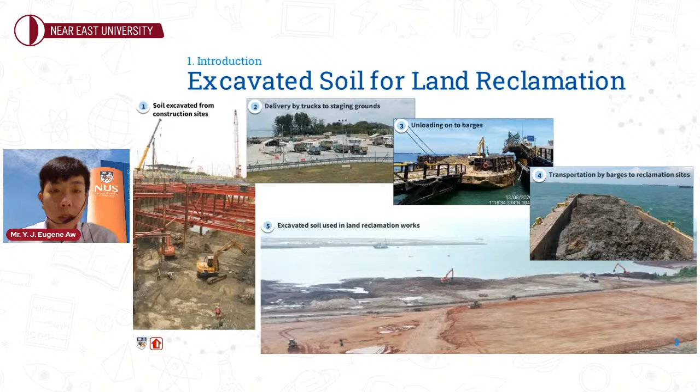After the soil is excavated, we transport them using trucks to facilities we call staging grounds. Over here, the soils will be loaded onto barges where they will be transported to the reclamation sites, and they are used for various reclamation works that depend on the soil property and quality.

There are two main uses for the excavated soils at our reclamation sites. The first one is soft clay, which is the clay soils that are very soft and also wetter, mainly used as infill material from the seabed to above seabed level. This soft clay has to be treated in order to accelerate consolidation and strength gain. The second type is good earth soil, mostly used for internal containment bunds and also the topmost layer of soil for compaction.

So misclassification of these soils may result in suboptimal use of the material and may pose challenges downstream. So there is a need for accurate classification of these excavated soils.

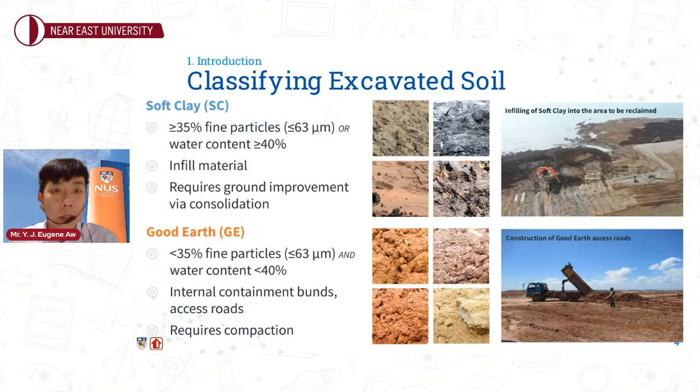The current classification process starts off with limited borehole data and soil sampling of the site. Then we move on to the excavation activities itself, and next is to transport these excavated soils. Finally, we conduct visual inspection and classify them into either good earth or soft clay.

The issue with this is that we receive thousands of truckloads a day, and lab testing of each truck is not practical and also labor intensive. Hence, we want to explore new technologies to improve this classification process, and develop a rapid soil classification method that is accurate, non-destructive, and also automatable.

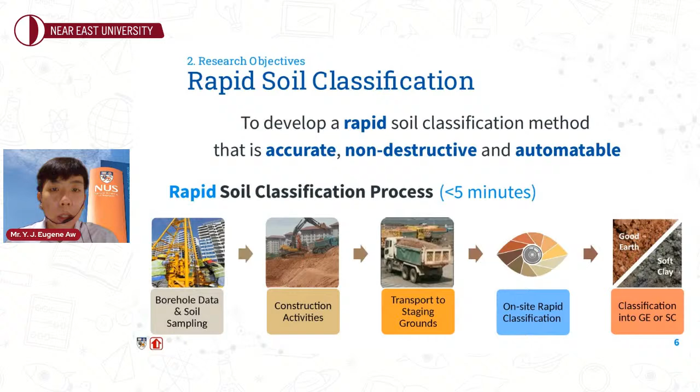So instead of the usual current process, we shorten it over here. Okay, the animation doesn't play right. Anyway, we will substitute it with on-site rapid classification, and this will replace the visual inspection and bring about objectivity and also more accurate and fast results.

So how do we do this? We explored the use of AI and computer vision to replace the visual checks at the staging grounds.

This computer vision process can be simplified into a four-step process. First, we obtain the image, the image acquisition. Next, we process it, segmenting the image and converting it to grayscale. Third is the image analysis, where we quantify the texture of the image using a gray-level co-occurrence matrix. Finally, the last step is to decide whether it is good earth or soft clay.

The hypothesis is that it is possible to use artificial neural networks to classify these excavated soils into two categories with more than 80% accuracy and in less than 5 minutes.

From previous research, we concluded that it is possible to use ANN, and we calibrated it using image texture feature data obtained from representative soil images. We successfully used them to classify into good earth or soft clay with decent accuracy.

However, the current system only captures data on the surface and does not account for possible soil layers that may be present underneath. Hence, this presents an opportunity for us to evaluate other methods and seek the feasibility of classifying soil with depth using complementary soil parameter measurements such as resistivity and soil strength, which I'll go through later.

The brief overview of the steps: firstly, we prepare the soil samples. We have 4 main tests. The first 2 tests are homogeneous soil mass, either good earth or soft clay. For tests 3 and 4, it's layered soil, meaning there's one soil type on top and another below. We perform 3 main tests: apparent resistivity, CPT, and moisture content. Finally, we evaluate the results.

In the first step, we prepare the soil samples in this huge soil box, about 1.8 times 1.2 times 1.2 meters, and we fill it up to about 1,000 to 1,200 mm of soil.

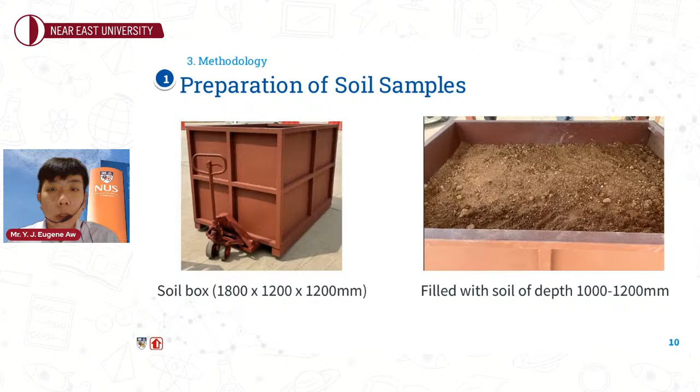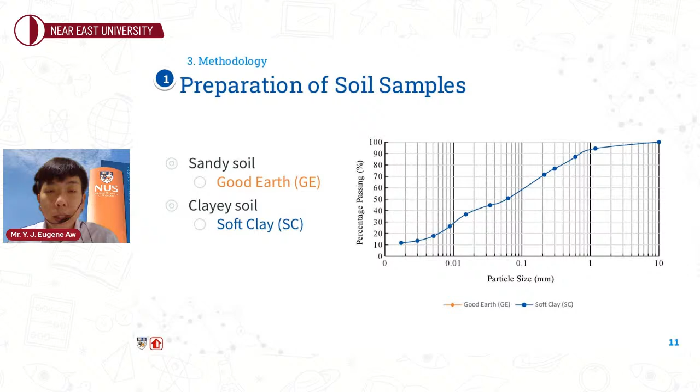For the test setup, we have the soil box, and secondly, the sensors installed on this huge frame. We have actuators installed above these sensors to push them down into the soil box.

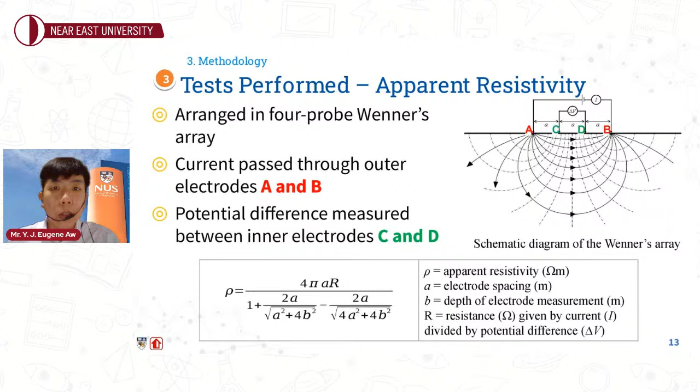The first test we perform is the apparent resistivity test, where we arrange 4 conductive probes in the Wenner array. We pass current over the outer 2 electrodes A and B, then measure the potential difference between the inner 2 electrodes C and D. From that, we can measure the apparent resistivity of the soil bulk under these 4 electrodes.

The second test we perform is the CPT test, where we developed a CPT cone in-house, and data is captured every second. The penetration rate is 8 mm per second, which is less than the standard 20 mm per second, because we want to ensure better sensitivity in the shallow thickness soil mass, since we only have about a meter of soil.

The final test we perform is the TDR, a time domain reflectometer, an instrument that sends a planar EM wave along the waveguides. The velocity of this propagation is used to derive what we call an apparent dielectric constant, a type of soil property, which is used to estimate the in situ volumetric moisture content. This is the instrument we use to measure moisture content without doing the standard oven dry method.

So over here at the results and discussion, firstly I'll go through the homogeneous soil, where test 1 is the homogeneous good earth, and test 2 is the homogeneous soft clay.

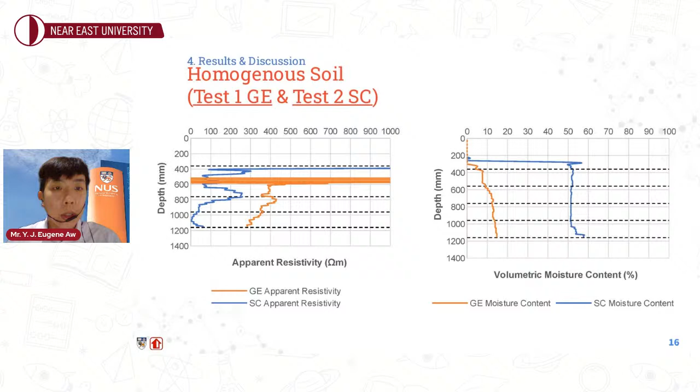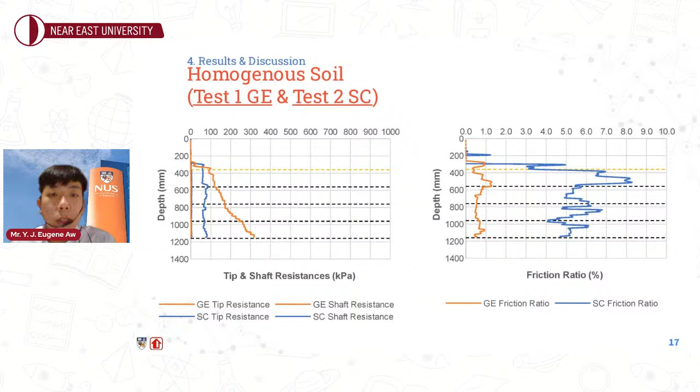On the right, the friction ratio also shows that the one in blue is definitely clay, hovering between 4 to 7%. On the left, the orange one, the sandier soil, is between 0 to 1%. So it's very clear and distinguishable between the two soil types.

Moving on to the layered soil, for test 3, it's the good earth soil on the top half and soft clay on the bottom half. Test 4 is the opposite.

To give a short summary of results: first, for homogeneous soils, these complementary soil parameter measurements were consistent throughout the soil depth. Second, for layered soils, these measurements are able to show significant differences between the top and bottom layers because they are different types of soils.

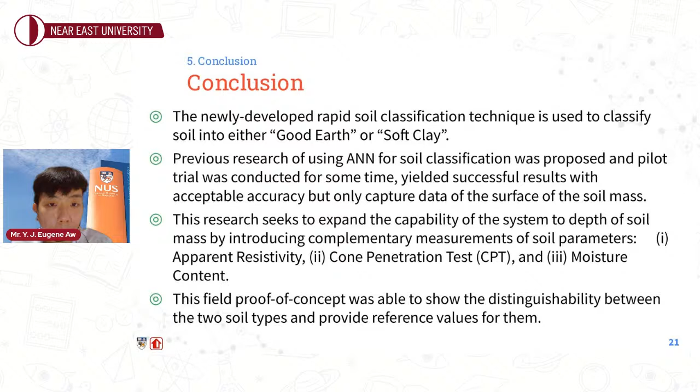This field proof of concept has shown that there is distinguishability between the two soil types. So that concludes my presentation. Thank you.

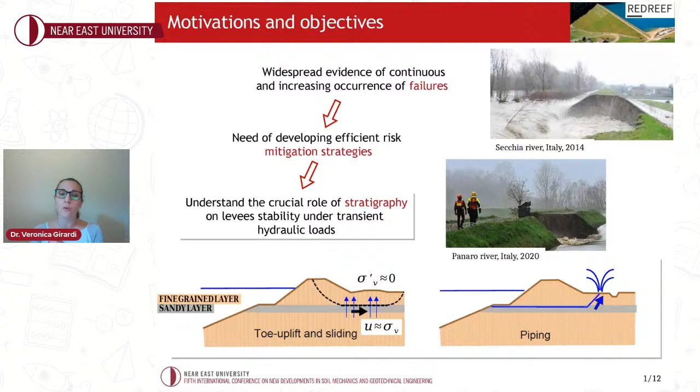Near the toe area, these two mechanisms have been investigated before, but they are still partially unknown and very hard to reproduce, especially numerically. They are also complicated in terms of prediction because we don't really know their spatial extension—whether they are just localized near the toe or may end up involving an entire collapse of the levee section.

For this reason, we decided to investigate these two potential phenomena using, in a combined manner, physical modeling by employing geotechnical centrifuge tests, and numerical modeling.

The first approach helps us investigate favorable conditions for instability in our structures and analyze the entire failure event, which is not always possible with available numerical codes, and also allows us to test monitoring instruments.

On the other side, numerical modeling helps us as a preliminary support to the physical test. It helps us carry out retrospective analysis and develop predictive models to be applied in other geotechnical engineering contexts. So my presentation today focuses on the numerical analysis that supports the physical test, in the sense that it supports the design.

In our team, we decided to test three well-known methodologies: the finite element method, the generalized limit equilibrium method, preceded by a seepage analysis, and the Van method, which is based on a force approach. It helps us define a factor of safety, like the other two methods.

The benefit of the Van method compared to the generalized limit equilibrium method is that it doesn't consider a purely circular slip surface. It can account for a straight part between two circular sides, forming a more complex triple sliding surface. These three methods help us try to reproduce the uplift and sliding phenomenon.

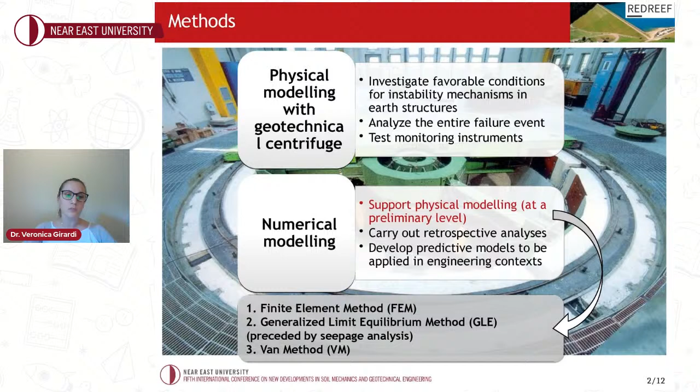On the other side, for piping, in a preliminary manner, we did an assessment based on some empirical relations.

We can start by going through the geometry we decided to test and the materials used. As you can see in this slide, I report the geometry at the prototype scale, which is also the scale we consider in all our numerical simulations, while the centrifuge is at the model scale. The relation between the lengths of the two models is controlled by the gravity scaling factor, which in our case is equal to 50.

We decided to work with a levee body composed of a mixture of two materials, TS and PON, standing for Ticino sand, a coarse to medium sand as visible in the granulometric curve at the bottom of the slide, and Pontida clay, actually a clay silt with low plasticity. Both materials are readily available in our areas and also used as construction materials.

Below the flood embankment, we can find a first layer of Pontida clay, and under it a layer of Ticino sand, which is shaped with a sort of chimney shape in a manner that we have direct interconnection of flow from the river side to the land side.

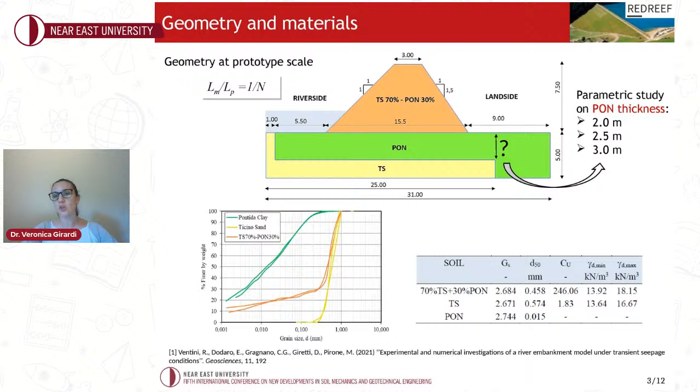We are particularly interested in understanding the impact of the thickness of the Pontida clay layer on overall stability, so we tested three different geometrical configurations with thickness 2, 2.5, and 3 meters.

During the centrifuge test, we have two principal phases. The first is the acceleration phase, where we go from zero gravity to the target gravity value. During this phase, we observe a consolidation process in our levee and in the foundation soils.

This phase is followed by a phase in which the river level is rising. We want it to rise to achieve a significant increase of pore pressure in the foundation soil. At the numerical model level, the first phase, acceleration and consolidation, can be reproduced very well with FEM, but not with the other two methods.

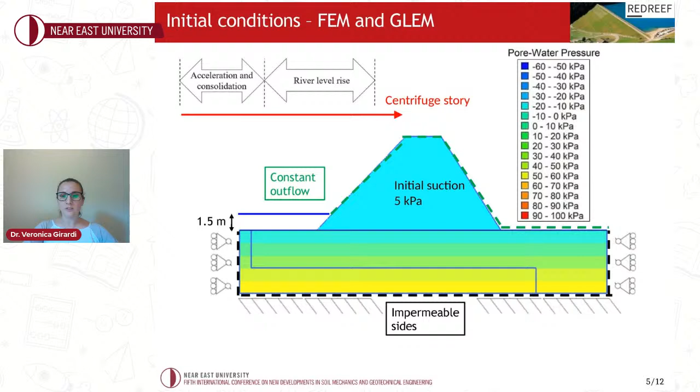The result of this boundary condition application is a distribution of pore pressure that you see in this slide. It's a little bit covered by the other graph because the animations are not really functioning well. I'm sorry for this, but the distribution of pore pressure you can see in the background is the one shown here.

After the initial part, acceleration and consolidation, we can move into the rising water table phase. In this part, we had to design a specific hydrograph that guarantees the increase of pore pressure and a certain control of the pore pressure distribution and of the failure mechanism.

Then the generalized limit equilibrium method, which comes after seepage, is performed at every instant of the seepage analysis during all the river level rise.

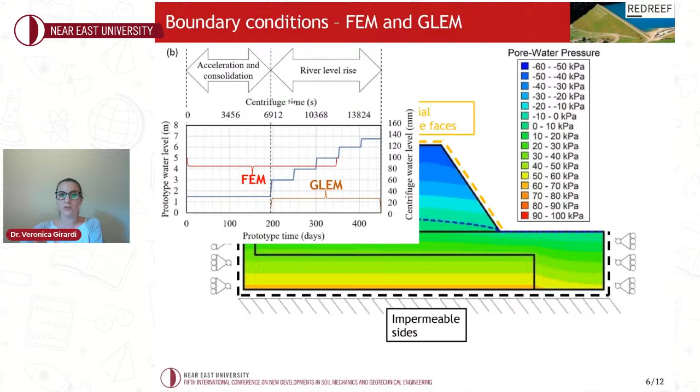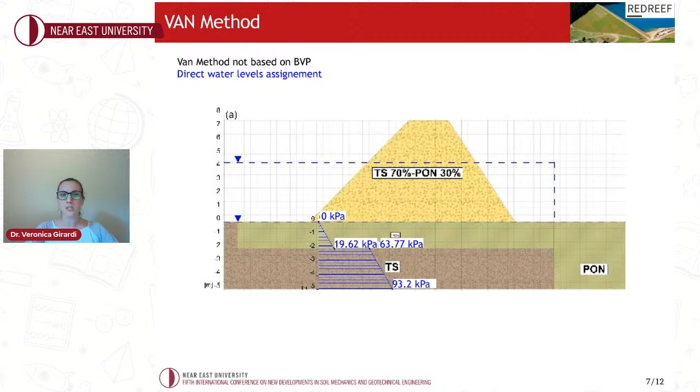Concerning the Van method, this is not based on a boundary value problem, so we don't have a seepage analysis. We can directly impose some water level, and we decided to work with two different water levels, one that imposed the distribution of pressure in Pontida clay, and one a little bit higher that imposed the water level in Ticino sand. This is based on an assumption of undrained behavior of Pontida clay with a concentration of high pressure only in Ticino sand, based on some previous experiences also in the literature.

Let's see now the results. First I want to present the results of the FEM simulation in terms of contour of pore water pressure, incremental deviatoric strain, and plastic failure points.

As you can see, we have a progressive increment of the distribution of pore pressure. In particular, when we pass from the river level of 3 meters to 4 meters, we notice that in terms of incremental deviatoric strain, we have a strong localization and concentration near the toe area, with an extension also on the land side and the river side. This has a correspondence in the sudden increment of plastic failure points near the toe, which somehow suggests the onset of an instability mechanism.

But we are interested not only in the FEM analysis, but in seeing the overall results, comparing them with the generalized limit equilibrium method and the Bishop method. If we consider the first two methodologies in the graph labeled A, we reported the evolution of the factor of safety with time and also the progressive increment of river level.

As you can see, in general, the generalized limit equilibrium method suggests the possibility of increasing the water level a little bit more before we reach a factor of safety less than 1, the condition of instability. In both methods, we can clearly see that the increase in thickness of the PON layer acts in a stabilizing manner, allowing higher water levels before instability occurs.

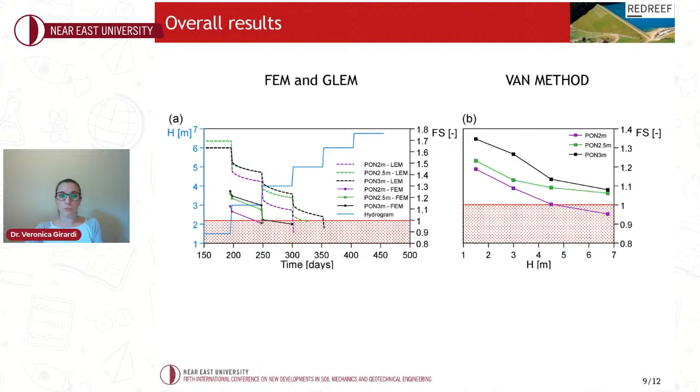On the other side, when we look at the Bishop method results, only the case with thinner PON thickness reaches a certain instability situation with factor of safety less than 1, while the other two geometrical configurations do not show potential instability, probably due also to the approximation we made in terms of pore pressure distribution. I will go briefly through the piping assessment, done with 3 different criteria.

These are the Bligh, Lane, and Sellmeijer criteria. In all of them, we had to compute the minimum seepage length and the creep coefficient based on the properties of the sand layer. Additionally, we assumed that the pressure head is different than 0 at the exit point, based on a recommendation popular in the Netherlands. And we calculate the critical head with these 3 criteria.

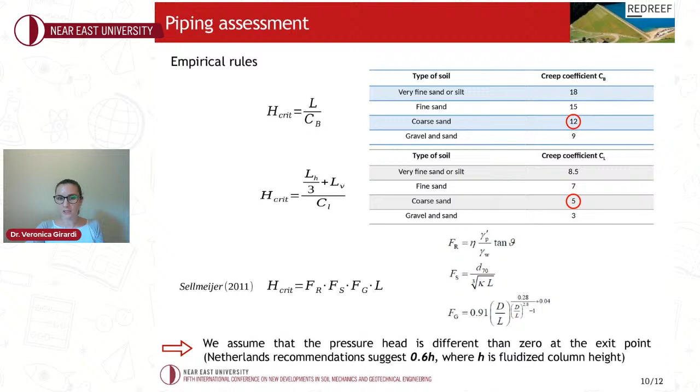I'm going to show you the results now, together with the previous results. What appears is that if we look at these criteria, the Sellmeijer method gives a lower critical head compared to the other two methodologies. Overall, they are a little bit lower compared to the results we obtained with the numerical simulations.

The 3-meter PON thickness, the bigger one, is actually guaranteeing higher water levels, which are still not as high as the levee crest, so we have a certain margin of potential additional rise. So we believe the potential optimum geometry that we are going to test is the one with PON thickness equal to 3 meters.

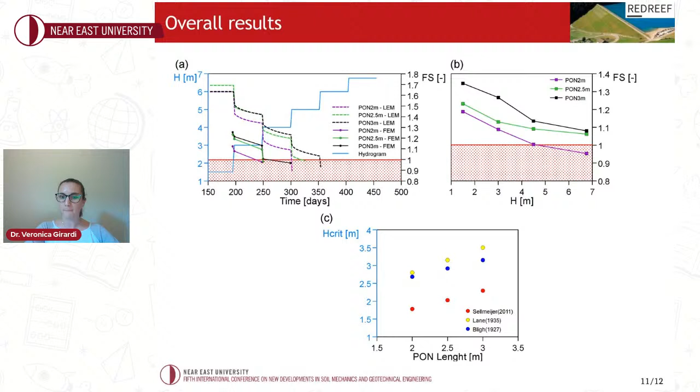To conclude with this study, I hope I was able to show you how we worked toward the design of a geotechnical centrifuge test by defining the geometry, the foundation layer thickness, and the selection of the hydrograph that highlights critical hydraulic heads which could potentially trigger failure.

To conclude, I want to show you the suggested location of the monitoring instruments during the centrifuge test. We believe it will be efficient to place a series of miniaturized tensiometers in the levee body and near the toe, a series of piezometers in the foundation soil to monitor the rising water pressure in the sand and also in the Pontida clay, and LVDTs and rototransducers near the toe area and the crest to monitor displacement and deformation during the test.

So thank you for your attention. If you're curious about the development of this project, here I've reported the link, which is an ongoing project, and we hope to show you further results soon.

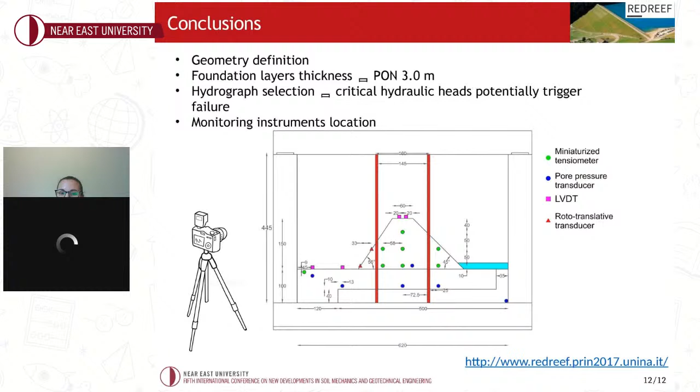Thank you, Veronica, for your nice presentation and your timely presentation. Thank you again, and now we are going to our next presentation.

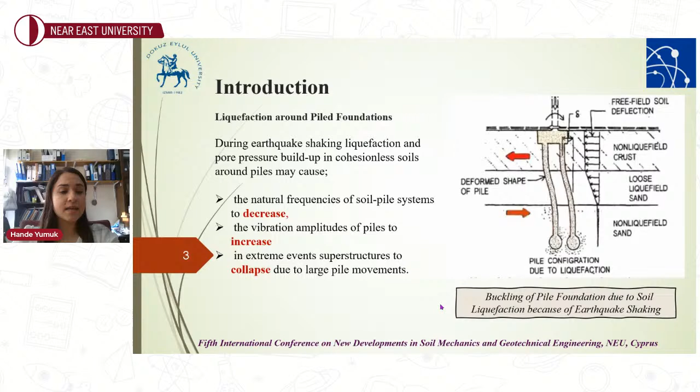As we talk about excess pore pressure's influence on inertial pile response in general, we talk about liquefiable soils surrounding pile foundations. During earthquake shaking, liquefaction and pore pressure buildup in cohesionless soils around piles may cause the natural frequency of soil-pile systems to decrease, and the vibration amplitudes of piles to increase. In extreme events, superstructures collapse due to large pile movements.

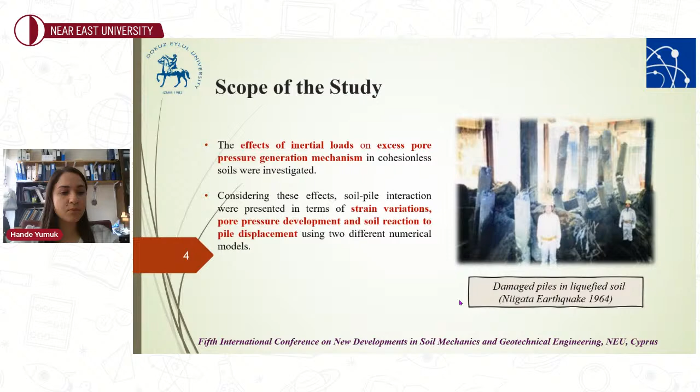The effects of inertial loads on excess pore pressure generation mechanism in cohesionless soils were investigated, as I said. Considering these effects in our study, we are going to see pore pressure development and soil reaction.

Let's show the influence of excess pore pressure development on pile response with the help of an analytical model. For instance, in this slide, we see the model by Kagawa and Kraft. In equation 1 here, the soil reaction is a function of soil stiffness and displacement rate.

However, it should be mentioned that in liquefiable soils, the influence of viscous damping is always negligible, and soil hysteretic damping as a result of nonlinear soil response is much more important.

We can see the backbone curve can be established step by step until we obtain the modified backbone curve, and excess pore pressure influence is incorporated into the backbone curve using excess pore pressure ratio.

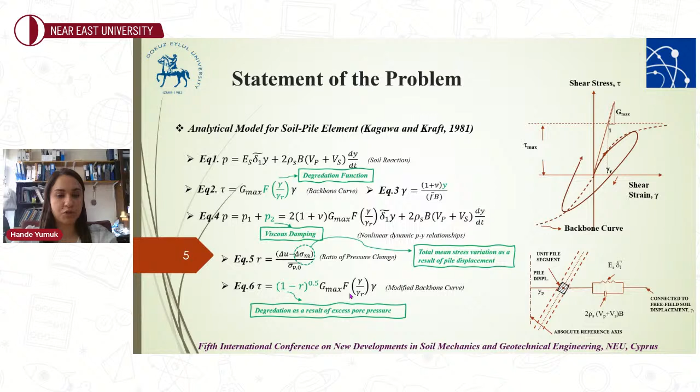Although analytical models such as the one given in this presentation may be utilized to incorporate the influence of both free field and near field excess pore pressure generation, the model may also be utilized to define excess pore pressure generation due to inertial interactions solely. Here we can see the final form of soil reaction as given in equation 4.

Now the question is to obtain excess pore pressure as a function of soil density, loading frequency, loading intensity, and the number of cycles. We try to obtain these within the scope of this study. However, I should mention that the results represent the preliminary results of my thesis.

As the study essentially targets pile response in saturated cohesionless soils, the Wildlife National Geotechnical Instrumentation Site was chosen. The University of British Columbia sand model was the material model used due to availability of calibrated UBC3D-PLM models in the literature. Soil parameters assigned to the finite element model are given in the table.

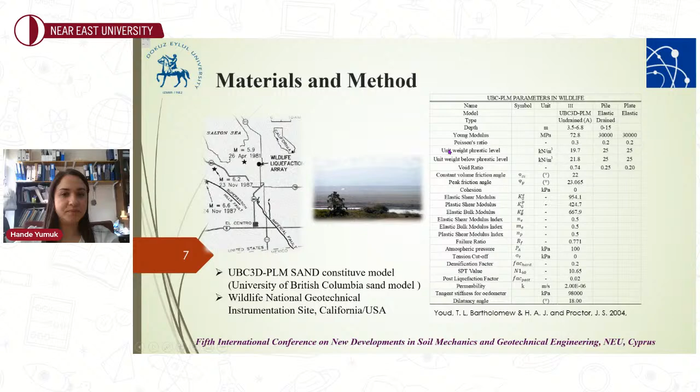The pile was modeled as an elastic volume element using a non-porous material model. There is a single pile that is fully embedded in loose liquefiable soil.

Two modeling approaches are considered in the study. Model A is a full pile-length model, and Model B is a slice model to represent a 1 meter thick cross-section of the full model. We run the slice model because it's useful to control boundary conditions.

We restricted the pile and let it displace only in the y direction, which is the loading direction. In these terms, we avoided rotation and just observed the changes in soil response as a result of lateral pile displacement. The mesh quality was reasonable in the finite element models.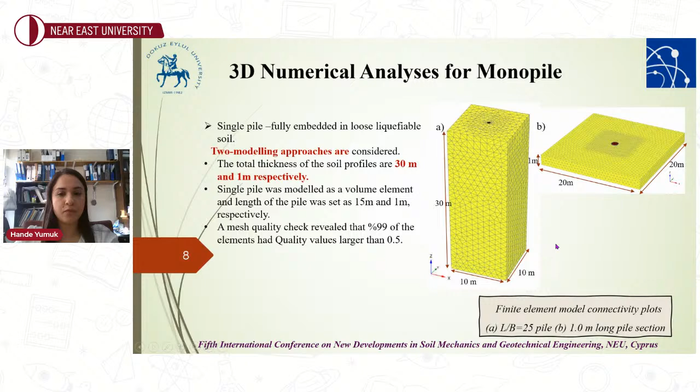The dimensions of the models can be seen in the figure. The slenderness ratio of the full-length pile is 25. In the analysis, we employed 10-noded wedge elements. The interface coefficient was 0.67.

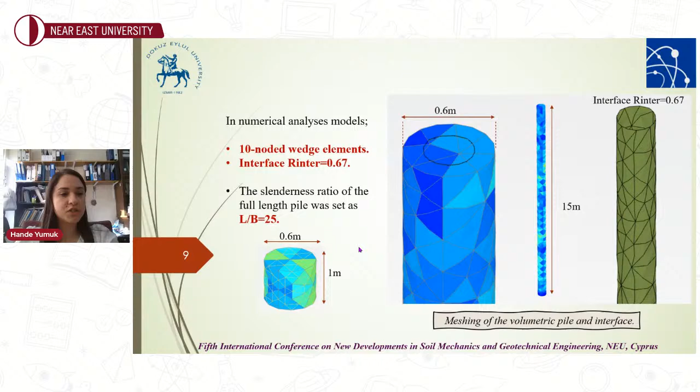We ran monotonic and cyclic analysis under drained and undrained conditions. The loading intensity varied between 25 and 300 kilopascals in the monotonic analysis, and 25 to 200 kilopascals amplitude with 1 and 2 hertz frequency in the cyclic analysis.

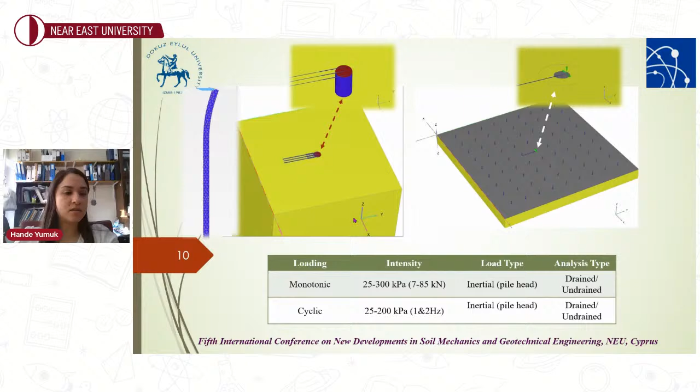We can see that especially at large loading intensities, the soil next to the laterally displacing pile liquefies for sure and gets into a probably viscous liquid state. As we go away from the pile, excess pore pressure development diminishes quickly. We can see that at smaller amplitudes, there's initially contractive behavior; however, after small strain amplitudes, dilative behavior governs, and the pore pressure development quickly becomes negative.

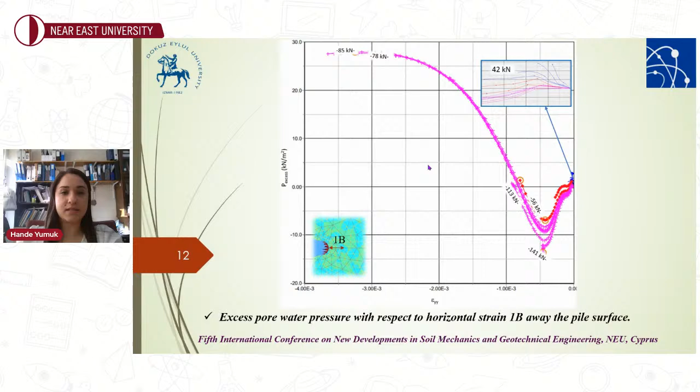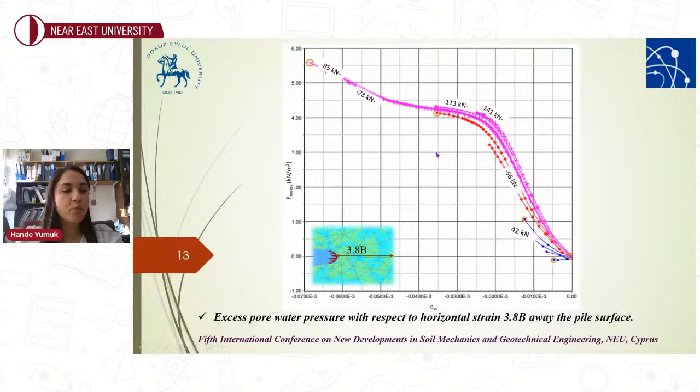At 3.8 pile diameters away from the pile surface, we see a completely dilative response, and the excess pore pressure magnitudes were quite negligible.

The PQ diagrams plotted here also show the influence of distance and loading frequency. At 1B away from the pile, the soil gets closer to failure, but further away, the soil response is of a dilative nature. Comparing 1 and 2 Hertz loading frequencies, the soil becomes weaker at larger loading frequencies.

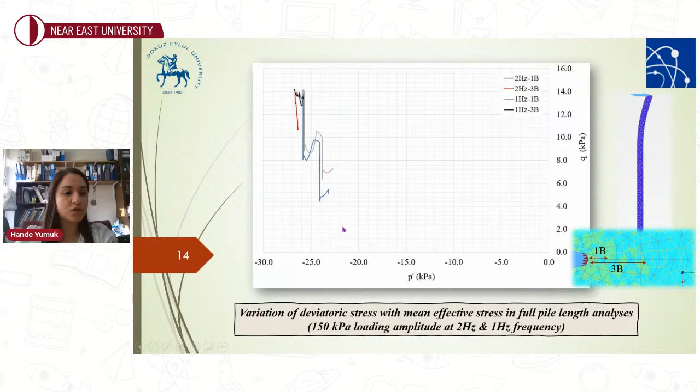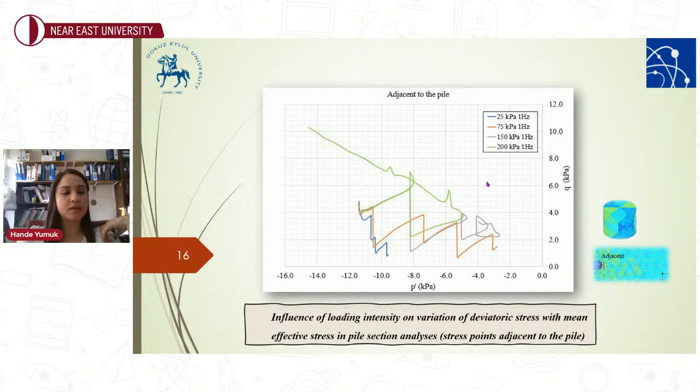But the comparison reveals that the pile slice model can also be utilized in soil-pile interaction analysis. Here we see the influence of loading intensity. As loading intensity gets higher, the dilative soil response becomes more influential, and the soil does not get closer to failure as it does with lower intensity loadings. The 25 and 75 kilopascal loadings are more critical in terms of soil response.

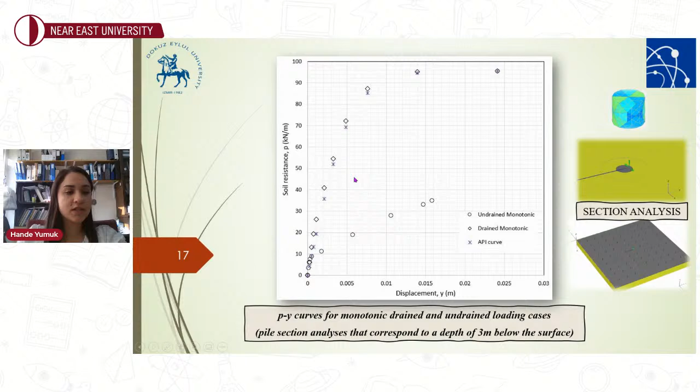Finally, we present soil resistance versus pile displacement. This is from the pile slice model under drained and undrained conditions, and we compare them with the American Petroleum Institute model for sandy soils. We see that especially drained monotonic analysis matches perfectly with the API model, and in undrained cases, due to excess pore pressure development, we see smaller soil reactions. There is a threefold decrease in undrained monotonic cases.

As a conclusion, we can say the UBC 3D PLM model can be utilized, and excess pore pressure accumulation can be obtained. However, we should mention that the UBC model may be quite sensitive to boundary value problems. Pile section analyses are found to be applicable to inertial cyclic loading cases. Both full length and pile section models show that high pressure gradients take place at the soil-pile interface, and a dilative response occurs at larger loading amplitudes.

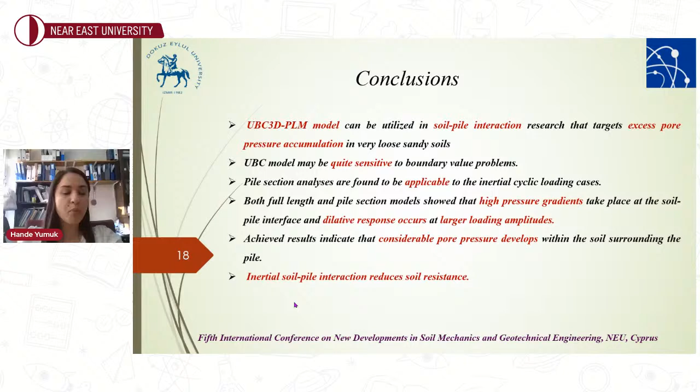Achieved results indicate considerable pore pressure develops within the soil surrounding the pile. Inertial soil-pile interaction reduces soil resistance. And here are my references, and thank you for your attention.

Hi everyone. I prepared my presentation as a video, but I can start.

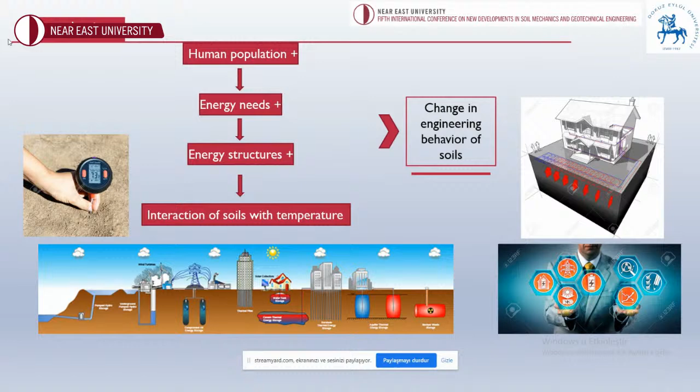As you know, the demand for sustainable energy sources and structures is increasing due to the increasing population and need for energy. Solid waste and nuclear waste storage areas, buried power cables, geothermal energy plants, and heat piles are structures and facilities that cause temperature change in the soil. Materials to be used as buffers are needed in order for soils to maintain their engineering properties against thermal effects.

The main energy structures that cause temperature change in soils are heat piles, buried power cables, solid waste and nuclear waste storage areas, and geothermal energy facilities. The temperature change in all these structures affects the properties of the soils foreseen during the design phase.

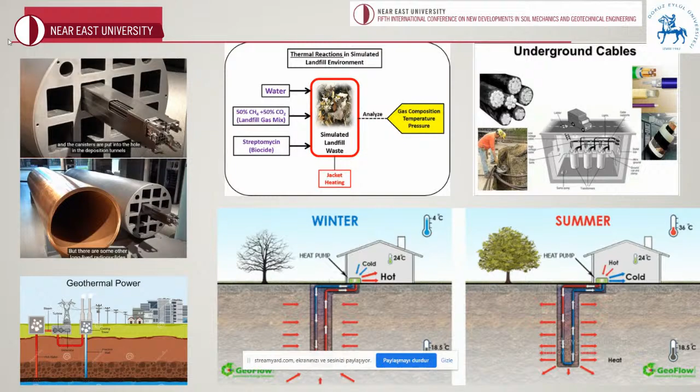Many studies have been conducted to examine the behavior of soils in the presence of temperature. Although there is still no clear view on some issues, some conclusions have been reached in general. For example, studies show that as the temperature increases, the amount of volumetric deformation increases and permanent deformations occur. In addition, it is one of the main findings that hydraulic conductivity increases due to the decrease in viscosity as temperature increases.

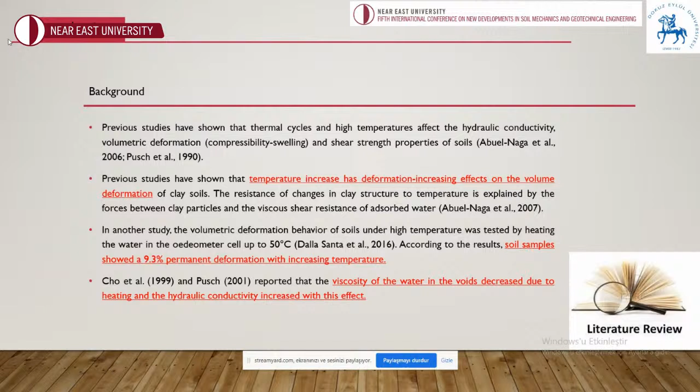In this study, we aim to obtain high temperature resistant soil material by adding perlite additive to sand bentonite mixture. Perlite is a highly porous material of volcanic origin with a chemical structure predominantly made of silicon dioxide. It's also frequently used in thermal insulation.

Table 1 shows the properties of the materials used in the experimental studies. In addition, images taken with XRD and scanning electron microscope at room and 80 degree temperatures are given. It is observed from these photos that perlite has a highly porous structure at room temperature, and these voids separate further under high temperature, causing the material to lose strength.

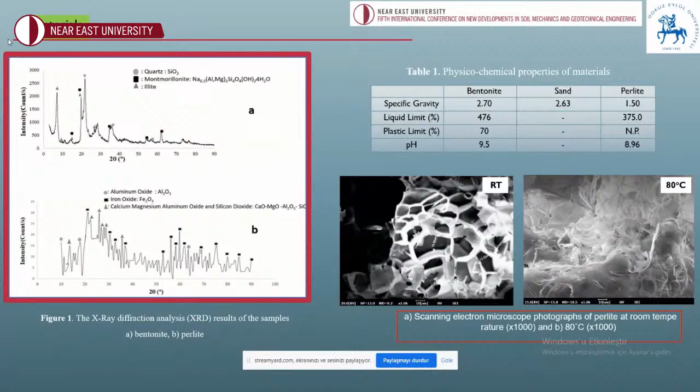With our compaction tests, we determined the optimum water content and maximum dry unit weight of the 20% bentonite, 80% sand mixture, and the perlite-added sand bentonite mixture.

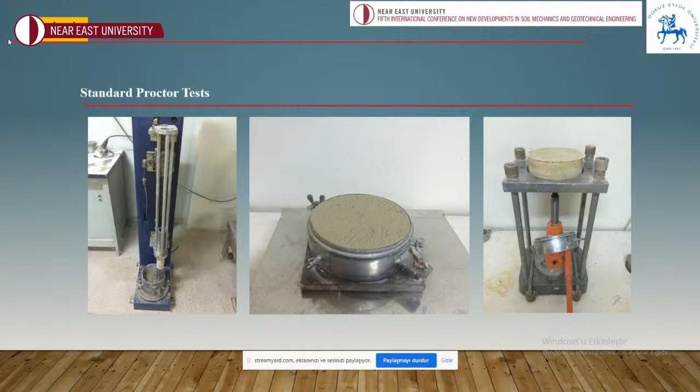For direct shear tests, the device you see in the photos was used under room temperature and thermal cycle conditions. In the test carried out at room temperature, the samples were allowed to be cut under 3 different normal stresses. In the test under thermal cycling, the samples were heated for 8 hours during the consolidation stage at 80 degrees and cooled for 16 hours at 25 degrees, then left to be cut. Black membrane-like elements specially designed for the shear box, a heat rod, and pipes were used against the possibility of water evaporation. In addition, the tests were carried out under a stress of 196 kPa for each sample.

The compaction test results show that the perlite additive has the effect of increasing the optimum water content of the sand bentonite mixture and reducing the maximum dry unit weight. This is because perlite is a very light additive with a dry unit weight of 2.9 kilonewtons per cubic meter and has a high water holding capacity.

The direct shear test results of the mixture show that as the perlite content increased, the internal friction angle of the 20B-80S mixture increased and the cohesion value decreased under room temperature. We can explain this behavior by the fact that perlite has silanol groups on its surface, and these silanol groups bind to hydroxyl groups at the edge of the clay plate, being held by the clay surface. Thus, the shear strength of the sand bentonite mixture increases with the addition of perlite.

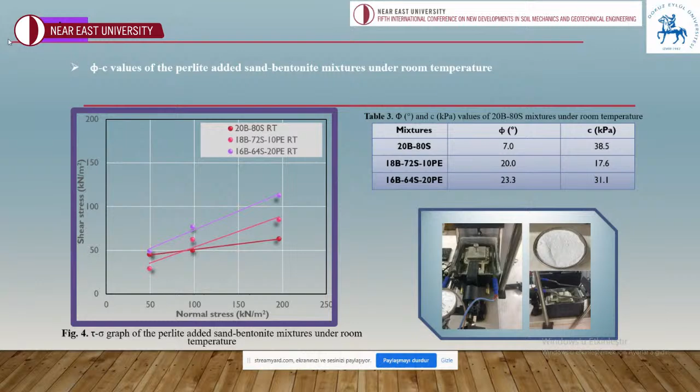However, this effect was not observed under temperature cycling. The voids formed in the structure of perlite with increasing temperature are irreversible when the mixture is returned to room temperature, and this causes a decrease in shear stress.

On the other hand, when the same mixture is taken into account, the fact that the stress value under temperature cycling is higher than at room temperature can be explained by the increase in ductility. In other words, because of ductility, the mixture can sustain more deformation under the applied normal stress in the presence of temperature.

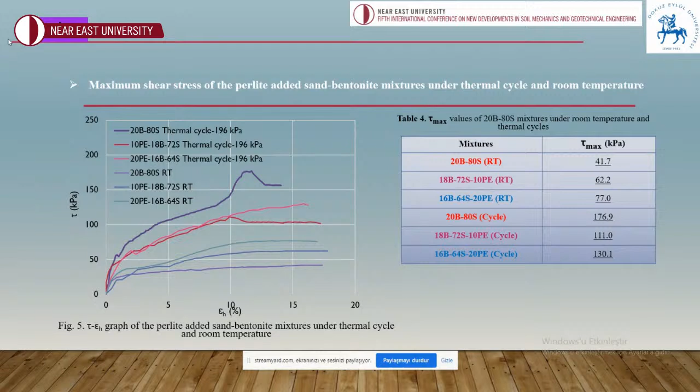Also, perlite additive decreases the shear strength of the mixture, but 20% perlite reaches higher strength than 10% perlite additive under thermal cycling. The lower bentonite ratio in the 20% perlite added mixture causes higher shear strength compared with the 10% perlite added mixture. In addition, the porous structure of perlite is one of the main reasons for this decrease in strength of the sand bentonite mixture under thermal cycles.

According to the results of this study, when perlite additive was added to the 20B-80S mixture, it increased the optimum water content while decreasing the dry unit weight of the mixture.

The direct shear test results performed at room temperature revealed that perlite has an increasing effect on the shear strength of the mixture. In addition, the results of the direct shear test performed under temperature cycling show that both perlite ratios have a reducing effect on the shear stress value of the mixture. The shear strength improvement effect of perlite on sand bentonite mixture was found to be significant under room temperature but insignificant under thermal cycles.

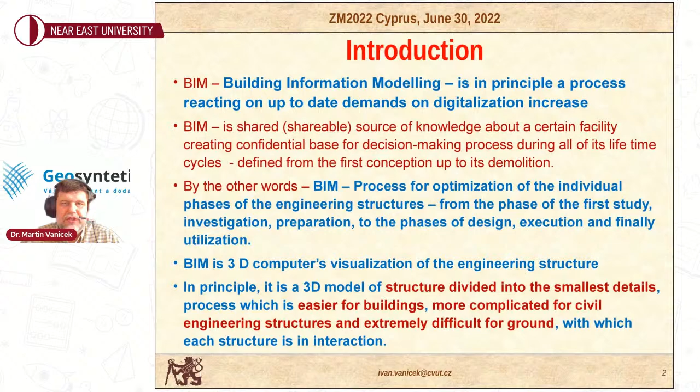BIM, in a sense, is a 3D computer visualization of the engineering structure, where the structure is divided into the smallest details. This is much easier for 3D models of buildings. It's more complicated for civil engineering structures, because there are not so many individual smallest structures. And it's most difficult for the ground, within which the structure is in interaction.

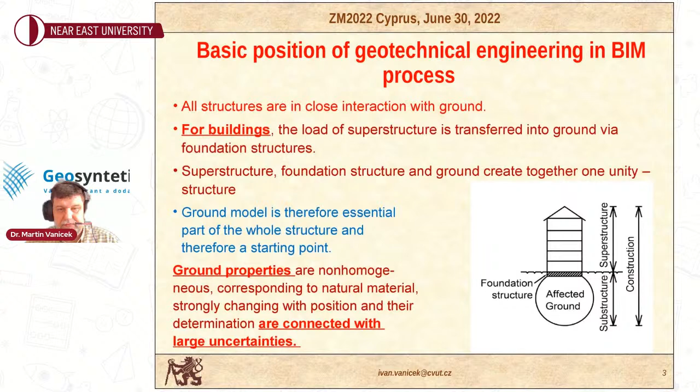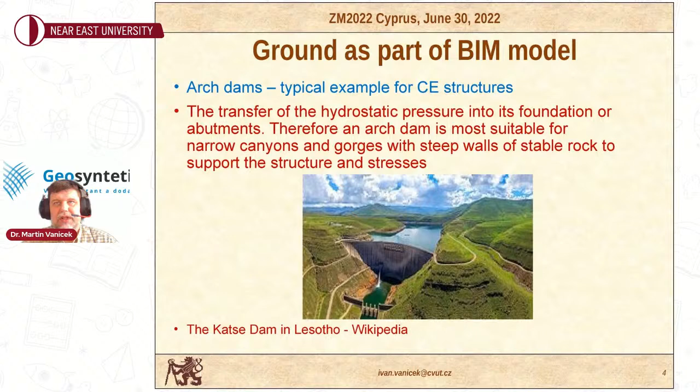So just to show an example of such a BIM model for civil engineering structures, the arch dam can be one of the nice ones. Because of transferring the very high hydrostatic pressure into its foundations, very often on good rock which is on the foundations and also on the side, the abutments, effectively it's best for very narrow canyons or gorges with very steep slopes. So you could see it's one of the important parts.

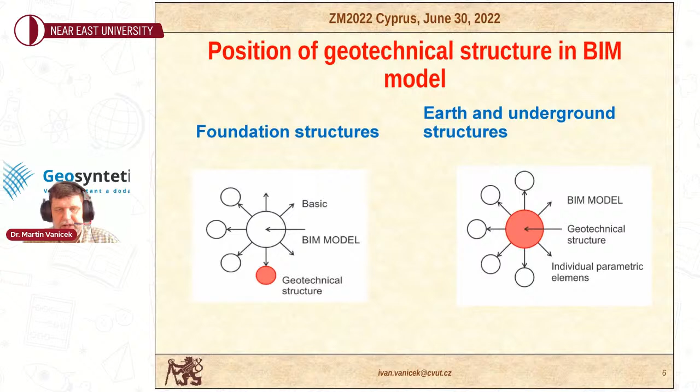So here the geotechnical model is very much in the heart of the BIM model. This pinpoints where the geotechnical modeling within the BIM model is. If we talk only about foundation structures, like for buildings, the BIM model is largely centered on the structure itself, and the geotechnical structure is a minor part, just the foundations, as shown in the figure on the left. On the other hand, for earth and underground structures, the geotechnical structure itself is the heart of the BIM model, and everything else just helps around it, as shown in the figure on the right.

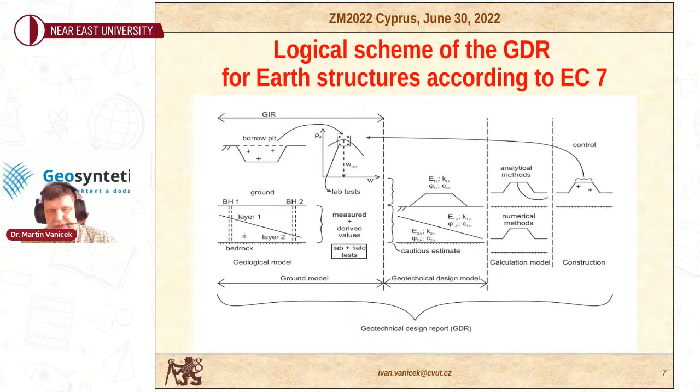So now we can talk about how to determine the ground model, or where it comes from. As shown on the previous slide, it comes from the ground investigation, and it's improved step by step during the design of the geotechnical structure.

Because we have to take very important care about what we do during the ground investigation and design, and both are very much connected to the structure's risk. So, in a sense, all partners of the construction process - starting from the investor or owner of the structure, the people responsible for ground investigation, down to the designer, and at the end of the day, the contractor - should work together. If not, it can sometimes be a disaster. But if they work together, they can decide the right ways to determine the ground properties and significantly reduce the risk to the structure.

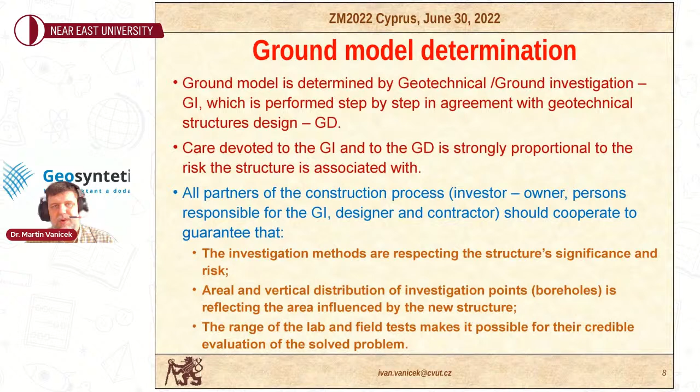What's important is to get the right distribution of investigation points, both horizontally and vertically, using boreholes, dynamic testing, in situ testing, geophysics, whatever is needed, and also to perform the right lab and field tests, so we get the right information about the ground and can much more easily, without big risk, solve the problem.

Here we're trying to show what are the links between different stages of ground investigation in line with the geotechnical design. At the beginning, we have a desk study for ground investigation. It's relevant for the study or idea of the project.

Then we go to preliminary GI if the project gets started. Then we do the first design, which is generally to place the structure in the environment, in the place. Then we do a detailed design to design it and to get a building permit. This design has to be reasonably detailed. If then we found out that the design is better to be modified, usually when the contractor gets on board,

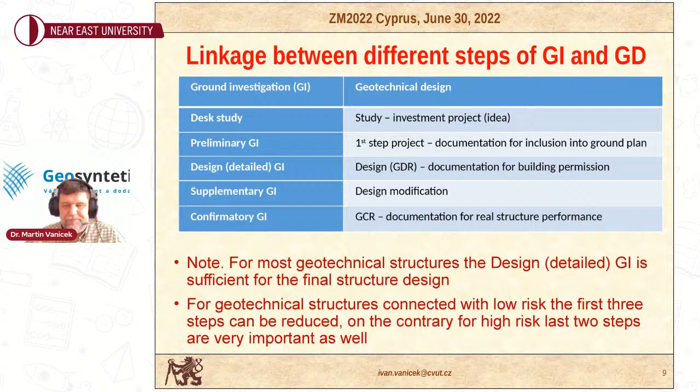So the first three phases of the ground investigation for transport infrastructure are generally divided as shown on the previous slide. The first one is a desk study. It's just to find out from historical data, existing maps, site walkover, the feel for the site, to get initial information about the geology of the site, and to be able to get enough information to say if it's worth doing the job or designing the structure or not. It can also be used in a very quick way for the environmental impact assessment as well.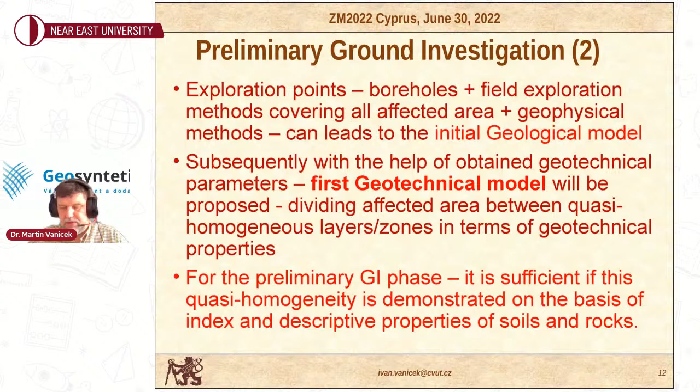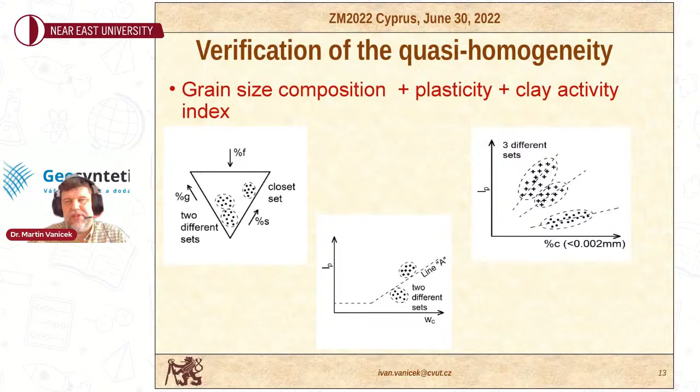So from the results of this preliminary ground investigation, we can more or less specify vertically and horizontally the traffic route or the center line of our transport infrastructure structure. We can determine where we will have fills or embankments or cuttings, where even tunnels will be, and if the embankments would be too high, then what structures we can do and how to found them.

It's also used for the preparation for the planning inquiry. It can be used to determine the ratio between excavations and fills, especially taking into account the quality of the excavated material, if it's possible to use it within the embankments or not. Generally we try during the design to make it equal, so that we would not need to store additional soil or rock somewhere else. So we have to take into account the sustainability of the construction, and also the price of purchasing the land underneath the transport infrastructure project.

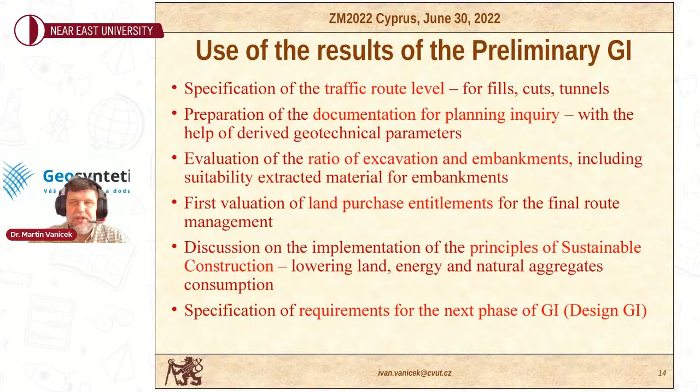And of course, we need to know the right information for what we have to do during the next phase of the design ground investigation.

So design ground investigation provides sufficient amount of relevant data on the rock and soil environment, which is needed for the design of a geotechnical structure, so it shall be safe, economical, and also environmentally friendly.

We need sufficient amount of testing and properties determined for each quasi-homogeneous unit, so we can do either statistical evaluation, or if it would not be a very important structure, then at least some engineering judgment on the right properties to be selected.

So here is a very high demand on quality of sampling, amount of it, and testing, both in lab and in field, in situ.

And of course, we have to determine the places where the geotechnical risk is the highest.

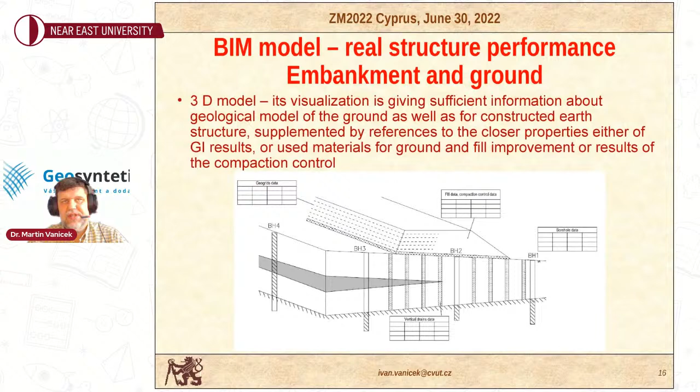So all this information has to be included within the BIM model, so the designer will be able to design it, and when it is transferred to the owner, they can maintain it, and if something goes wrong, be able to use it for the help of others in the future.

And we get to the conclusion of our presentation. So to accept the BIM model, for geotechnical engineers it is really a nice chance to get more in control and to get a higher profile for their profession.

Once it's accepted properly, it can help the optimization of the ground investigation, the design, and also the structure execution, especially with respect to the risk the structure is associated with.

Geotechnical engineers can cooperate with the information with the other partners within the process, and this can be a big advantage.

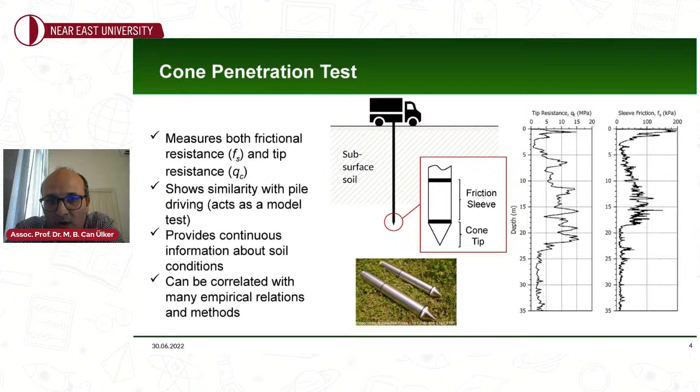Why do we use CPT? Because there's a whole bunch of them out there in the field. Many tests have already been done by companies or research groups, so it's out there. And in order to make good predictions using machine learning methods, you need a very large database. The larger the database, the better your results will get. So since we have many CPT results available, why not use them?

And as you know, CPT gives us information about both the physical properties and engineering properties of soils. So it's a very valuable test in this regard.

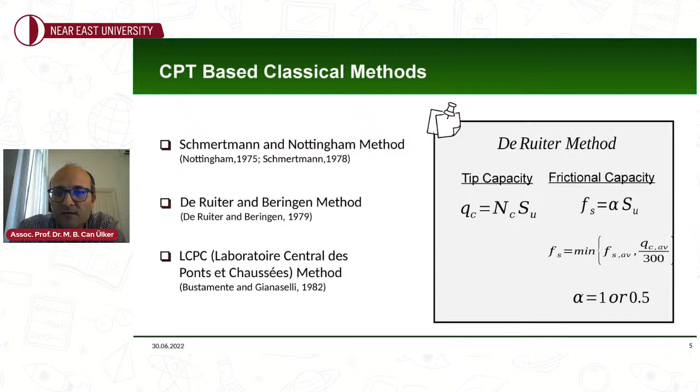I'm not going to talk too much about the details of the machine learning methods we used, but I want to give you an idea about this emerging topic, not just in geotechnical engineering, but in civil engineering and other knowledge engineering fields. There's both linear and nonlinear machine learning methods. Leaving linear methods aside, nonlinear methods are mostly black box methods. However, as long as you know how to use them and have a large enough database, they give quite good predictions.

So we can talk about both boosting-type nonlinear methods and other nonlinear methods. We've seen people often use other nonlinear methods such as relevance vector regression or Gaussian process regression. However, we wanted to go in a different direction in this research and use what's called boosting methods: extreme gradient boosting, light gradient boosting, and categorical boosting, the three boosting methods we've used in our research. The difference between these boosting methods and other nonlinear methods is that these provide high processing speeds.

As you can see here, these methods can be used in processing large data, and in the meantime they need less computational resources, so they're not computationally costly. It's quite efficient, and it also allows parallel processing. They're 10 to 20 times faster than other typical nonlinear methods.

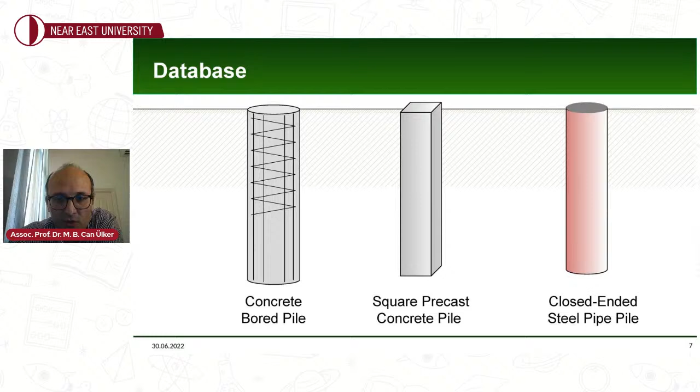As far as the database, we used both driven piles and drilled shafts, as long as their ends are closed, so they're called closed-ended piles. About 219 case records are used from 52 different locations, where all the piles were loaded in compression. In the paper we also provide the sources of this database, because those of you working in machine learning will know it's hard to gather data. You spend weeks and months gathering data first, and it has to be consistent and complete. You have to have the full information associated with it, and then you can do the analysis.

Having set the database, we need to determine the input features. We used pile length and cross-section area as the geometric features of the pile, and on the soil side, cone tip resistance at the base of the pile (QC end) and the average cone tip resistance along the pile (QC average). According to our analyses, also supported by Shaheen 2010, sleeve friction measurement is less dependent on capacity, or has lesser effect on predicting pile load capacity when associated with machine learning, so we leave it aside.

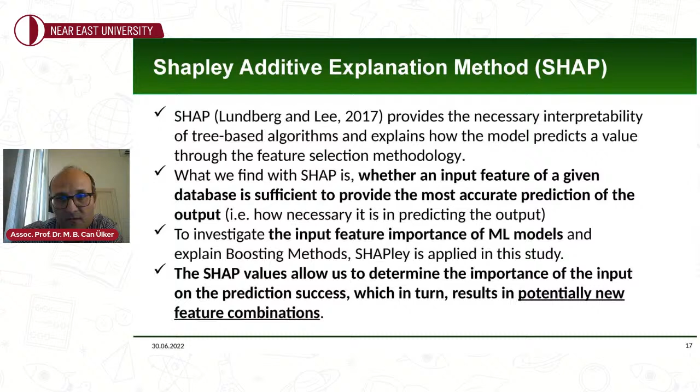So Shapley allows you to identify what input features are going to be sufficient and necessary to have the most accurate prediction at the end, in short. And then once you do that, it can also potentially lead to new feature combinations. For example, you start with 5 features in the beginning, then your Shapley analysis gives you results saying, say, 3 input features will be sufficient, not 5, leave out the rest 2. You don't know whether that's going to be the case, maybe 5 will be the ultimate value. So the idea is to be able to come up with all this.

It's just that the SHAP exhibits interpretability with the effects of features on each observation. So you account for the effect of input features on each observation of the data in the database, and then you go with the final outcome. But then the machine learning methods themselves do the job too for you. The machine learning methods themselves provide this feature interpretability, which is called Gini Importance. So the importance given to the input features by the trained machine learning models is also calculated in our analysis. Then we compare them with the Shapley and decide whether they match as far as the inclusion of input features or not.

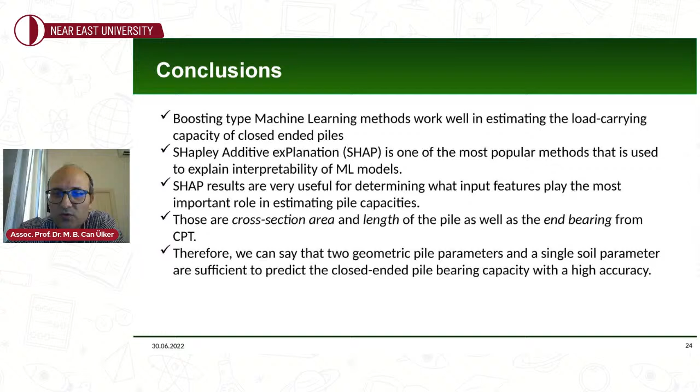In conclusion, the boosting type machine learning methods work well in estimating load carrying capacity of closed-ended piles. Shapley is also quite applicable to determine what input features are necessary for the highest quality predictions, especially for load-bearing capacity of piles. We determined that 2 geometric pile parameters, length and cross-section area, and 1 soil parameter, the tip bearing of CPT associated with the pile tip, are sufficient for the most accurate prediction. That's all I can say. Thank you very much to TÜBİTAK for supporting our work in this 1001 project, and thank you for listening to me.